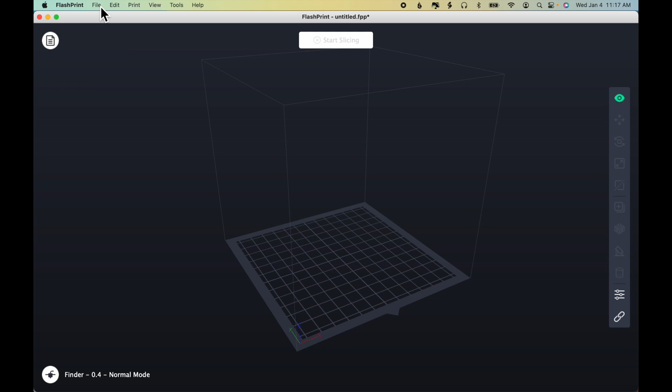Now we're going to slice and print our first model. Open FlashPrint, and on the File menu, click File, then Examples, and then 20 millimeter box. So we have a simple model to work with.

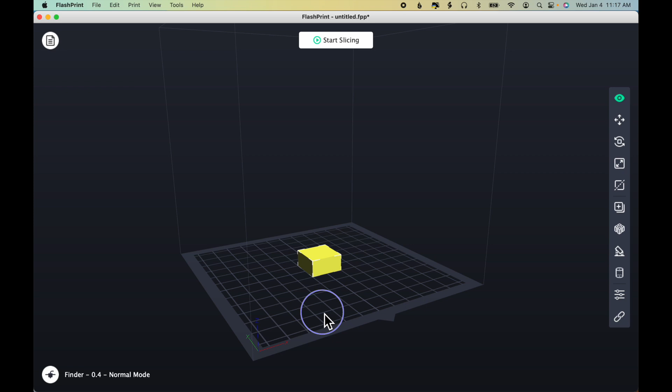On my mouse pad, I'm using 2 fingers, sliding up and down to zoom in and out on the object. And on my MacBook, if I hold down the Control key and click 1 finger and drag, I can rotate around the model. Looking at the bottom, you can see that it's solid blue in color. That indicates that the model is flat on the build surface, which is what we want.

There are lots of options on the side. We'll be looking at those later in other lessons, but for now, we're going to keep the defaults and slice the model. So slicing means that we're going to convert this virtual model into layers or slices that the printer will then lay down layer by layer until the model is finished.

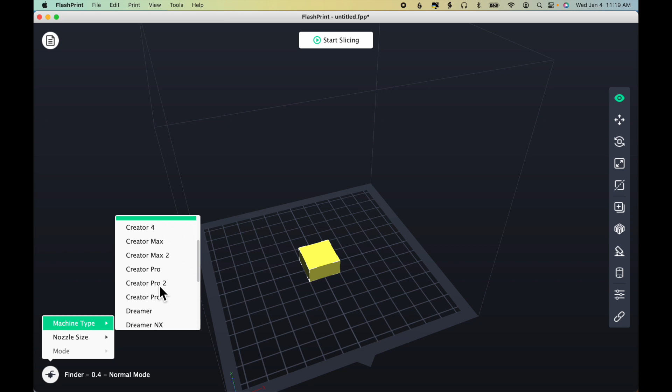Before I do anything though, I'm always going to double check in the bottom left-hand corner to make sure that I have the proper printer and modes set. If I click on the icon and look at the machine types, you'll see that there's a Finder 3 and a Finder. The Finder 3 is a newer model of the Finder, and that is not what we're using. We're using the older model of the Finder. And if you have a Finder Lite, you would use the same older Finder model. So it should say Finder 0.4 normal mode. And the 0.4 is the diameter of the nozzle.

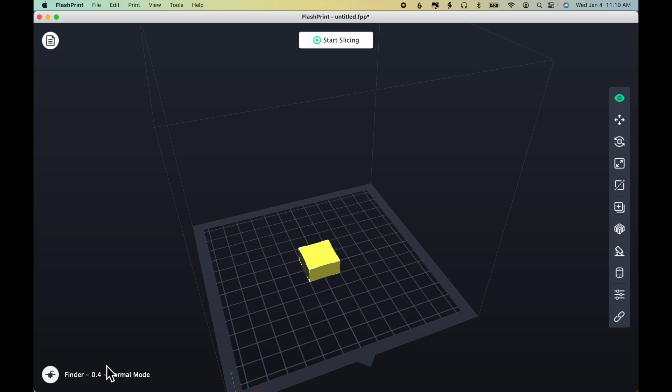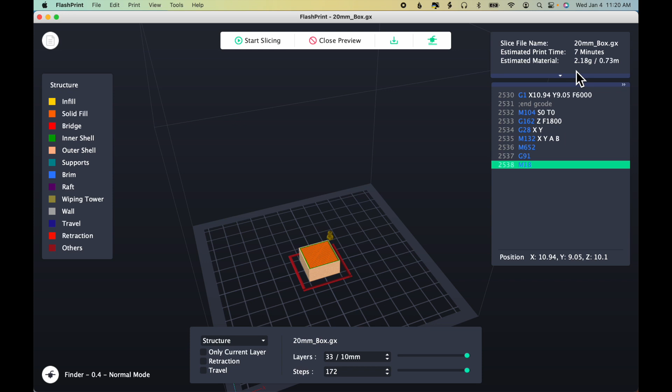So I'll click Start Slicing. Again, I'm going to keep all the default settings here, and I'm going to click Slice. And then click Slice Preview. The first thing to notice here in the upper right-hand corner, the program gives us an estimate of how long the print will take, 7 minutes. It also estimates the amount of material that will be used. In this case, 2.18 grams. Generally speaking, you purchase filament in 1 kilogram rolls, so you know how much you paid for 1 kilogram, and using some basic math, you can figure out exactly how much it costs in material to print this model.

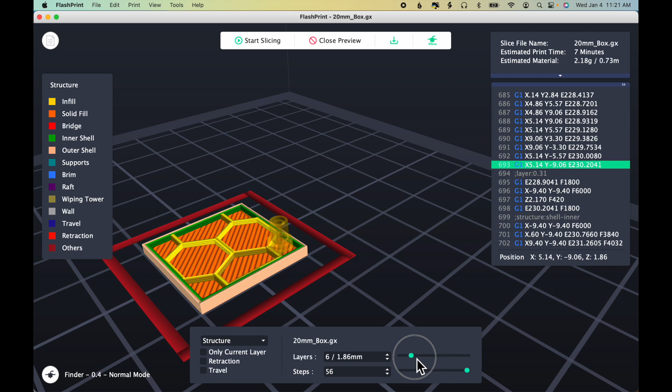On the bottom of the screen, there are 2 sliders. I'm going to zoom in a little bit so we can look more closely at the model. And if I zoom in enough, you can see the layers, right? You see those lines going across. And the top slider says layers. And if I move it back and forth, you can actually see the model being printed layer by layer by layer. You'll notice that by default, there is a solid bottom, and the interior is mostly hollow. This is called an infill pattern, and most 3D prints will be made up mostly of empty space with just a little bit of interior support.

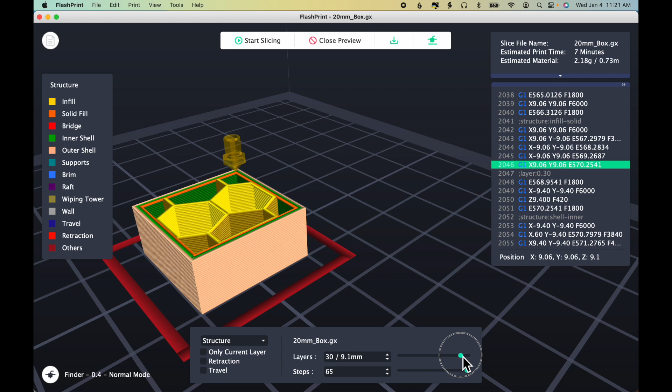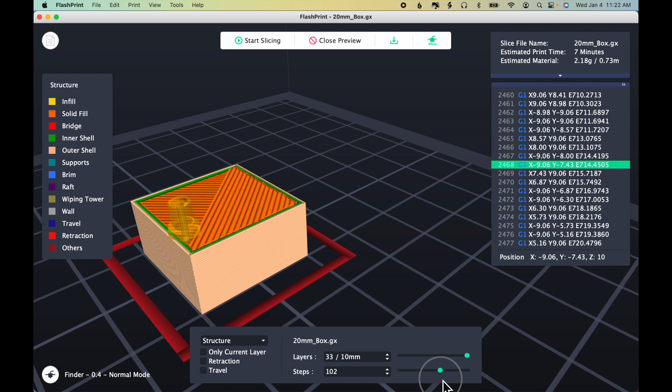As I slide layer by layer up to the top, you can see the infill ends there, and then one top layer is printed, then another top layer, and then another top layer. So in this case, there are 3 top layers. And the bottom slider, if I use that, that shows the steps within each layer. So if I go to the beginning, that's the start of that last layer. And you can see as I slide along, the printer prints the outside wall, and then it will move across diagonally and lay down that very top layer.

You can also notice, probably, as I'm moving the sliders, that this funny looking code on the side is scrolling. That's the actual file that we're creating using this slicer. We're creating what's called a G-code file. You can see up at the top, the default file name right now is 20mm_box.gx, and the GX is a type of G-code file. And you notice that all of the lines of code begin with G, or many of them do at any rate.

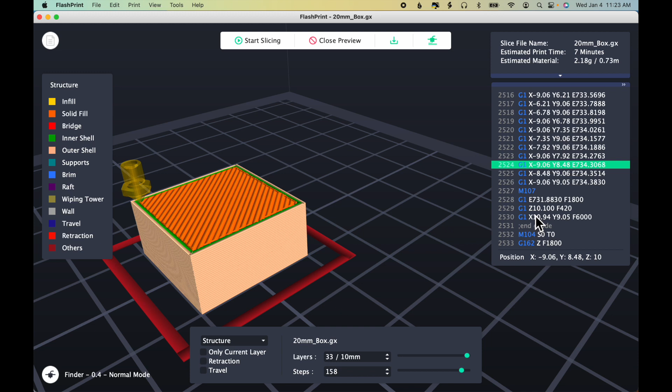So as I slide through, you can see each movement of the tool head is determined by a set of X and Y coordinates in the G-code. And then after a layer is done, the build plate will lower down a certain amount in the Z direction and continue with the next layer and so forth until the print is done. Okay, now we're satisfied with that.

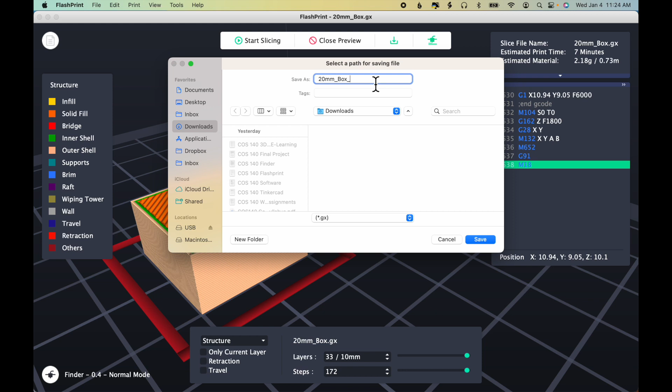So now all that remains is to save the file to a USB drive or SD card, depending on what type of machine you have. The regular Finder will have a USB drive slot on the side, and if you have a Finder Lite, then you will have an SD card slot on the side of the machine. So I'll click this icon, 20 millimeter box. I like to add the print time to the file name, 7 minutes, so I know how long it's going to take. Choose, in this case, I have a USB drive, and you notice it's adding the GX file extension. And if I check my USB drive, you can see that the file is there.

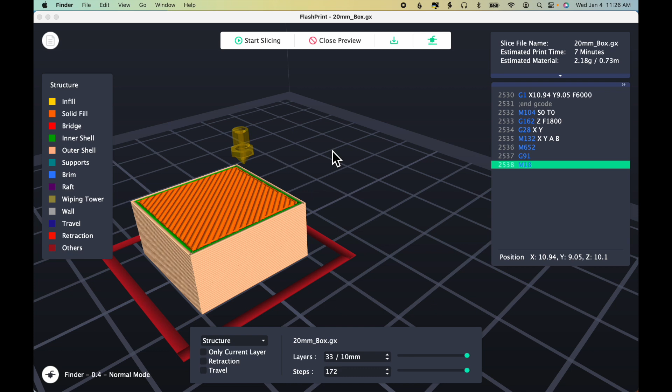Now we'll eject the USB drive and plug it into the side of the machine and use the same steps that we did for the 3D test squares to print the file. Turn on the machine, heat up the nozzle, load the filament, plug in the USB drive or the SD card, and tap on build, and the model will start printing.